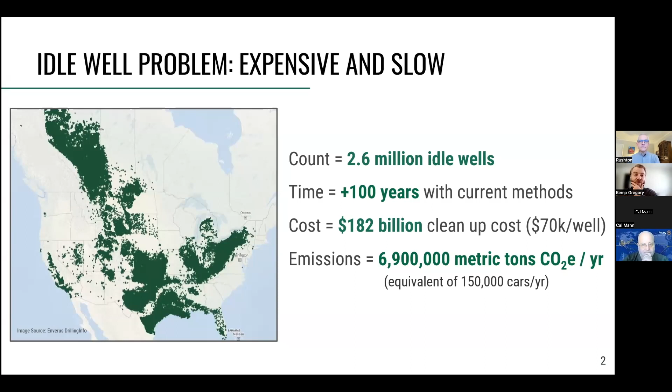So really, we're here to talk about two problems, actually. The other problem is that wind and solar, although their prices have come down extraordinarily, and that's great for lots of reasons, we are faced with the inexorable challenge of matching Mother Nature's supply curve to civilization's demand curve. Neither are willing to budge, so what we've got to do is create some energy storage that can move things around, specifically move supply around. And so as a society, we have turned to the lithium-ion battery, which has been very, very useful, but it faces some challenges in solving this problem at scale.

Those problems are: it's high cost, it's usually only applied for short duration, and by that I mean it tops out at the 4 to 8 hour range. But we're going to need something more like 50 hours worth of coverage in certain scenarios. It degrades over time, and there's an environmental impact, all of which I'll touch on a little bit later.

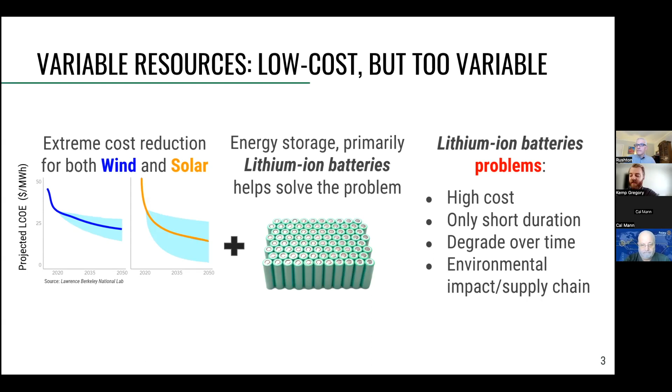So the way we solve the first problem is called plug and abandonment. This is an industry term, I didn't make it up. It just means that the well goes from being a liability to being nothing. But a little bit of context is key here.

When I talk about an idle well, I'm talking about something that has three distinct characteristics. It is not plugged, so it's just sitting there open to the reservoir. It is not an orphan well, so it is still owned by someone, usually a big company, and it has not produced oil and gas in the last 2 years. So it's sitting there truly just doing nothing.

And they're often on top of depleted reservoirs. So even if oil price went to $500 per barrel tomorrow, it's not like all the idle wells will just go away. We're talking about a relatively permanent liability. But every oil and gas company is required to clean up every single well they own, and that's where plug and abandonment comes in.

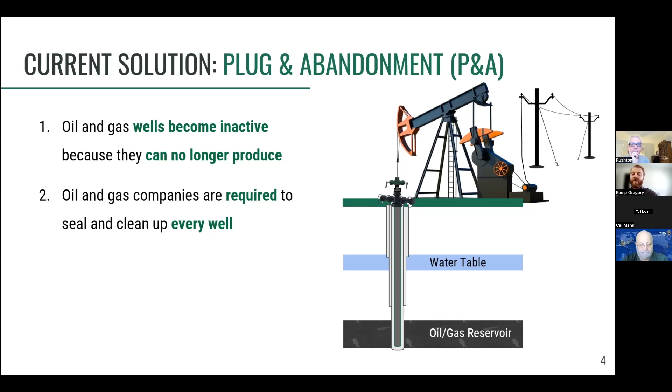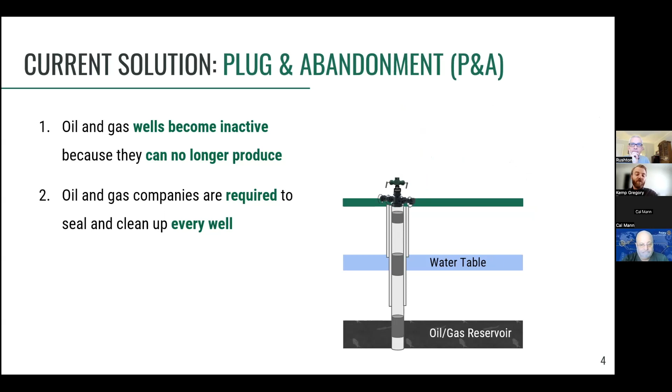I'm going to walk you through what that process looks like quickly. So you take the pump jack away, you take the electrical infrastructure away, you take the tubing out of the well, you put 3 plugs in it. If we're in California, other states have different rulings, but it's typically about this. You cut the wellhead off and you make it whatever it was, forest if it was forest, desert if it was desert, you get the idea.

The thing is, that's expensive. It's on average 70 grand and can be way higher, up to 5 times higher than that. There are wells that cost $1 million to plug and abandon. All that said, about 20,000 happen every year, but it's not something the oil and gas industry is really that excited about. They don't want to do it because it costs money and they don't make any money in the process.

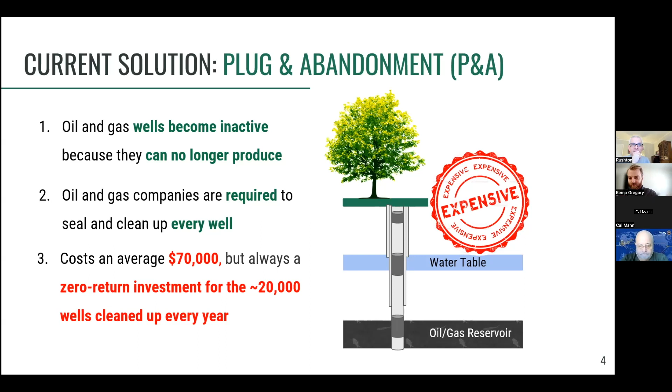So the other solution that we've turned to for the other problem, the renewable energy problem, is lithium-ion batteries. So here's some stack ups of various battery technologies and their 2030 capital cost, and here's how we compare against them.

So we can have extraordinarily low capital costs for 2 reasons. One, we're repurposing a bunch of infrastructure, so we don't have to pay for that much. And 2, we actually have 2 revenue streams. One, there's the energy storage services that we provide to the grid, like any other battery. And then there's another one where we are helping the oil and gas company convert their idle wells into gravity wells, and we charge them for that.

That's a service. And in doing so, that well gets to get pulled off of death row, if you will, and given a whole new life. And then the oil and gas company basically turns into a little landlord. We pay them rent for the well, but we charge them an upfront fee for the conversion process.

Okay, so for every time that we extract more lithium out of the ground, at least in a hard rock example, we're talking about a massive mine versus an oil well cleanup. The price of lithium carbonate has gone up 7 times over the last 2 years.

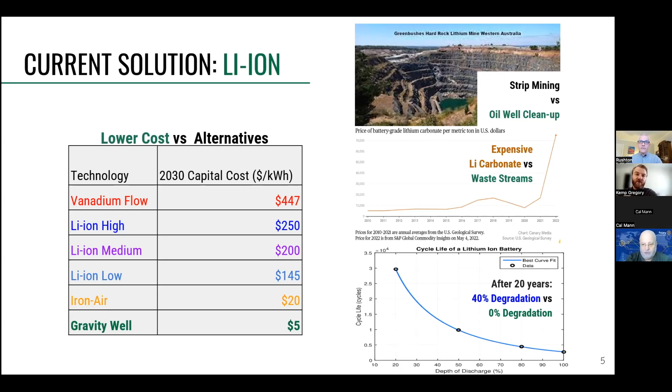Versus us, we'll just use waste streams, used oil field tubing, and sand, anything cheap that we can put inside the well, the weight that goes into the wellbore. And lithium-ion batteries degrade up to 40% over a 20-year lifetime, whereas we have 0 degradation because we're strictly a mechanical system. So without further ado, I'm going to tell you a little bit more about how our system works.

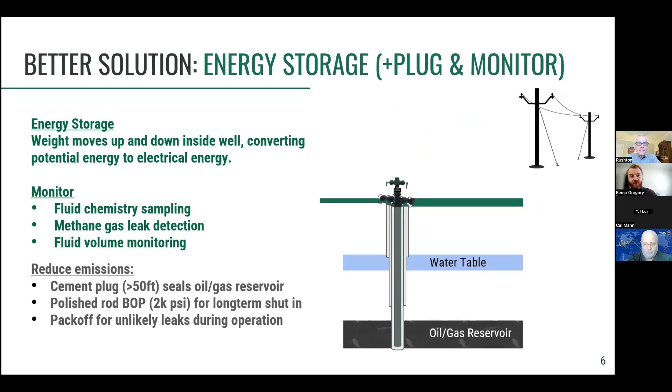So the better solution to both of those problems is energy storage plus plug and monitor. We're going to increase environmental compliance and create the most flexible energy storage in the world. So we start by taking the pump jack away, leaving the electrical infrastructure, because that's super important, taking the tubing out, putting a plug in the well, and now we install our system.

So we call this system a gravity well. It is a mechatronic energy conversion, or just another way to say a fancy regenerative winch. It has a motor generator, kind of like a Tesla has a motor generator. So when the weight is moving down the well, we're pushing power to the grid. And when the weight is moving up the well, we're pulling power from the grid to motor.

So weight moving up means we're motoring, weight moving down means we're generating. So it's power in, power out.

Then we add a few more gizmos to this, specifically an MT style pack-off and a trip tank to do fluid chemistry sampling, methane gas detection, and fluid volume monitoring. The pack-off is there just in case of the freak occurrence of there being pressure in the well. We can seal it up, make sure there's no leaks. So just to reiterate, it's a totally mechanical system. It just works by converting potential energy to kinetic energy to electrical energy back and forth.

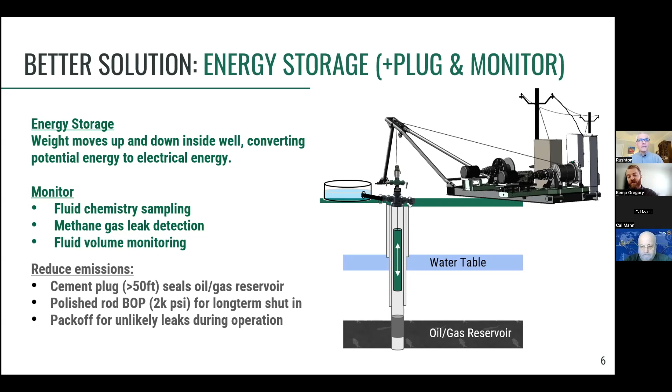Okay, so how it works: a well needs to be deemed suitable. It's got to meet 9 criteria for whether or not the well is a good candidate for conversion into a gravity well. So let's say that this well on the left has passed all the tests and meets all the criteria.

So what would happen is a workover rig, which is like a shrunken drilling rig, would go out and do the first few steps of plug and abandonment - the same steps we just walked through. The pump jack goes away, the tubing gets taken out, and the plug gets set under the bottom of the well. Then we use that same workover rig to install our weights, and then we set our system down next to it, and it's ready to go.

So what's happening there is that finally, it'll serve for 30 years as an energy storage mechanism, performing things like load shifting, electricity arbitrage, and frequency regulation - lots of things that other batteries do. I'll get to the unique application of our battery in just a few slides.

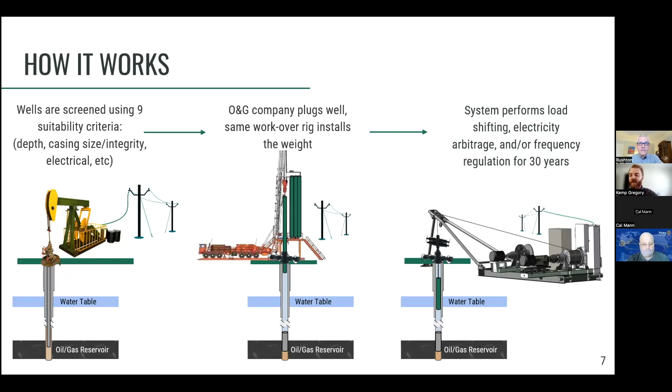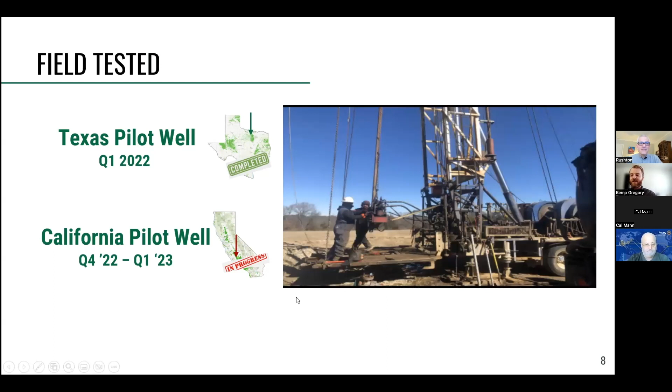So we field tested this. We did it in Texas. There's a beautiful well that we found in Texas and then repurposed, and we're going to get to see a few videos and images of that. There's the workover rig, there's us moving in our prototype, which we call Artemis Prime. And here it is operating.

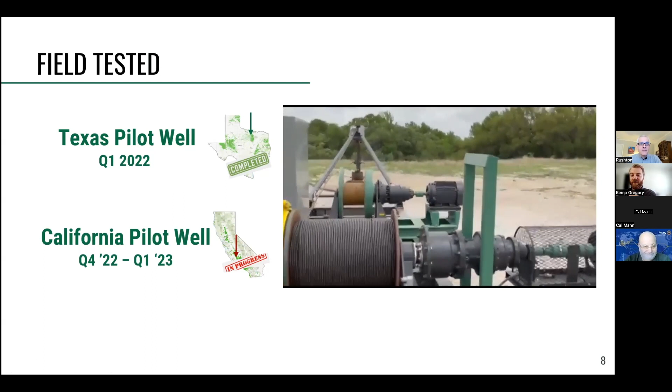So a little tour - you can see briefly that the drum is spinning counterclockwise, which means we're pushing power to the grid, or we're in that generating mode, which means the weight is moving down the well.

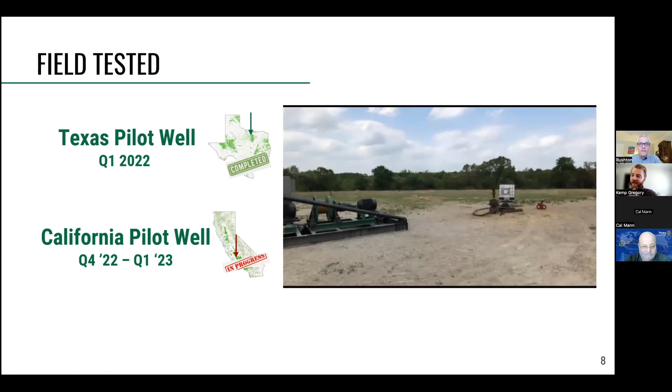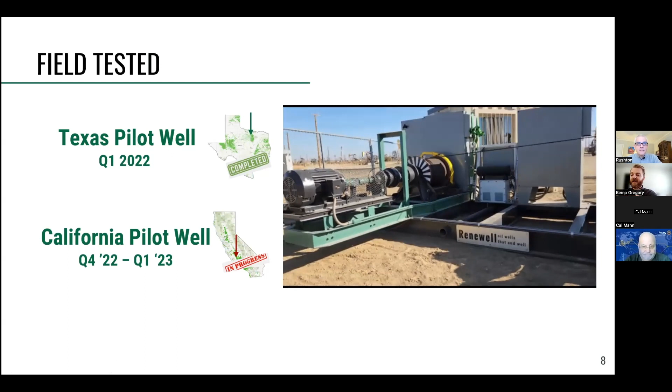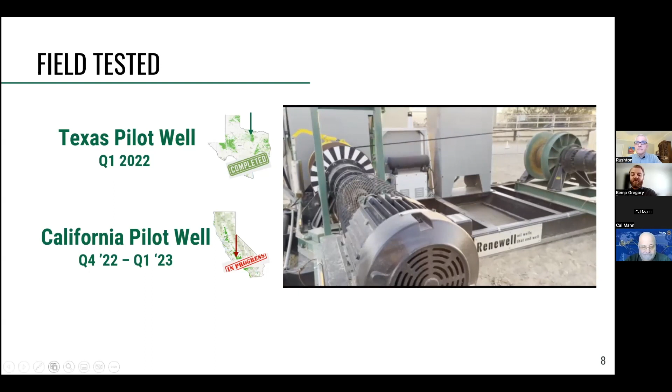And then the round trip efficiency is something that we established in the Texas pilot. We have a range - we topped out at 74%, which is actually a little bit higher than we were expecting as our top end. But if we can get to 80%, which is where we expect to be, then we will essentially be operating in the top tier of round trip efficiencies compared to other energy storage technologies.

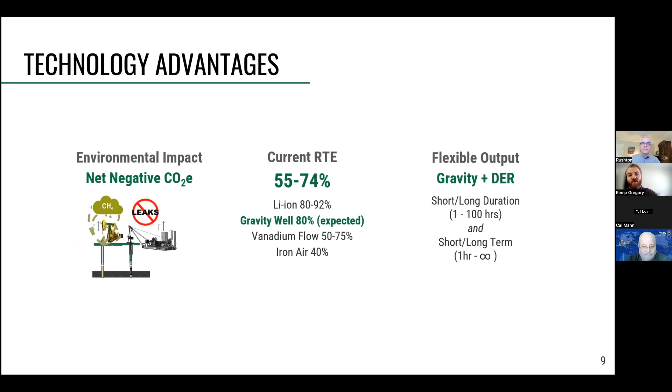So that makes us extraordinarily unique, and we think that in the future it's the most flexible energy storage technology that will win, because what the grid is going to need is not going to be discrete and arbitrary amounts of duration. It's going to be weather dependent, which is going to be variable. So one day the grid's going to need 50 hours, the next day 212, and the next day 91.7. It's just going to be variable.

So one more note on this, on our environmental impact. A lot of people ask, well, how much carbon are you actually removing? I mentioned we remove it in a unique way, sealing up the wells to prevent methane from leaking, but we also wanted to quantify our energy storage impact. So that's what we call indirect, and sealing up the wells is what we call direct.

So base load displacement, this is just assuming coal's on the margin. We can displace that many tons of CO2 a year, and it comes out to about 350 million tons by 2050. And that's just the United States. There's another million or so odd wells in the rest of the world that could have a pretty important impact as well.

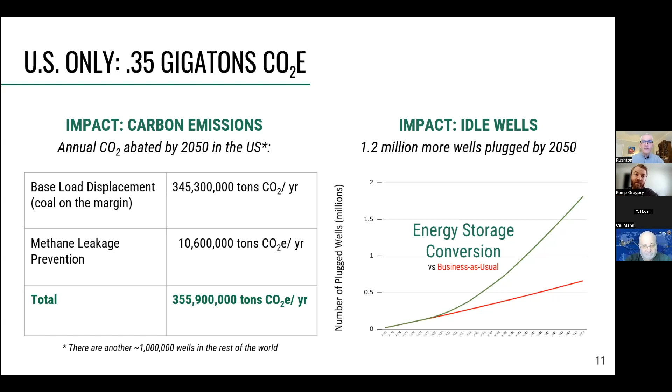That's it. Happy to take questions, and thanks for this platform.